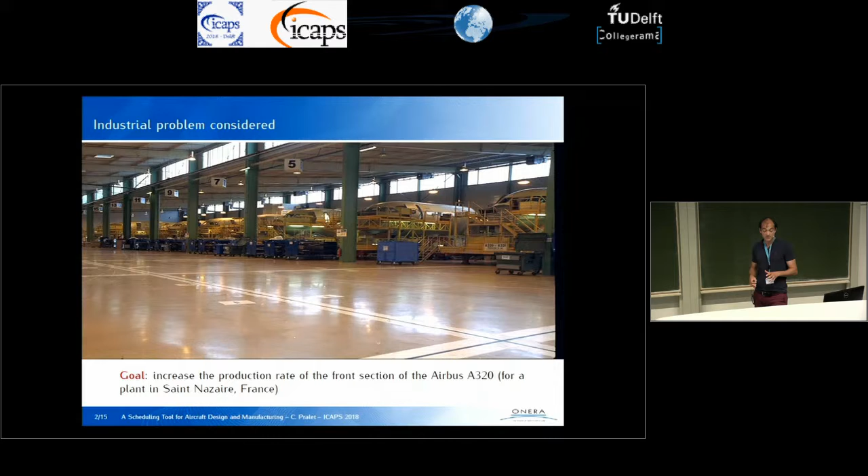In this work, we are interested in increasing the production rate of aircraft, more precisely the A320 aircraft. One of the parts of this aircraft is built in a city called Saint-Nazaire in France, and you can see here the assembly line, which produces a bit more than 50 aircraft per month, and each aircraft costs approximately $100 million. So it's very interesting for Airbus to increase the production rate.

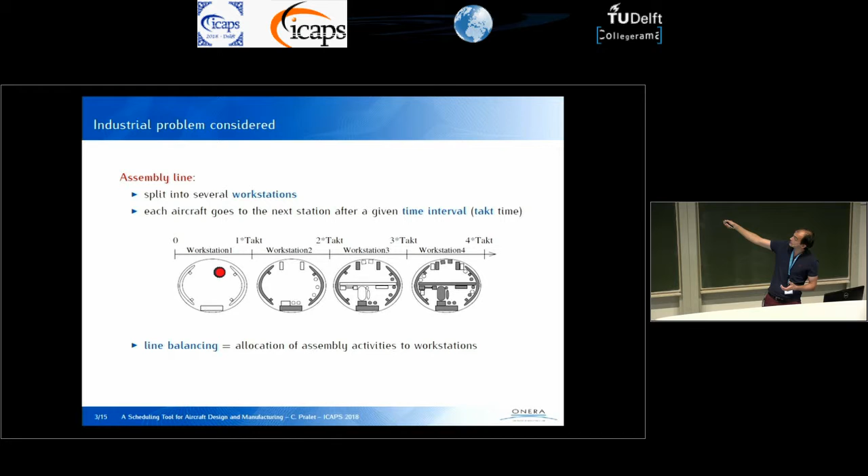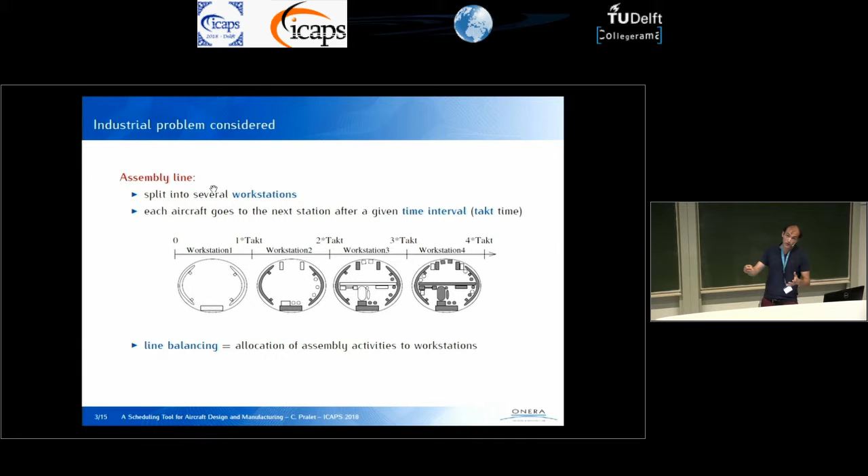In this assembly line, we have a set of workstations, and the principle is that each aircraft goes from one workstation to the next one, and at each step, additional parts are integrated in the aircraft. Here you have a representation of the section of the aircraft, which is almost empty at the beginning, and at the end of the assembly line, it is full of a lot of parts. And at the manufacturing level, the manufacturing teams build what is called the line balancing, which allocates all assembly activities to the workstations. Now, how do we increase the rate?

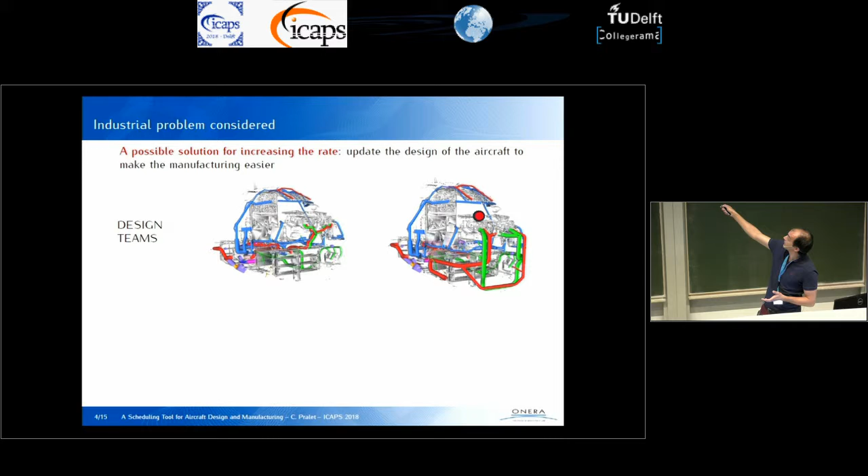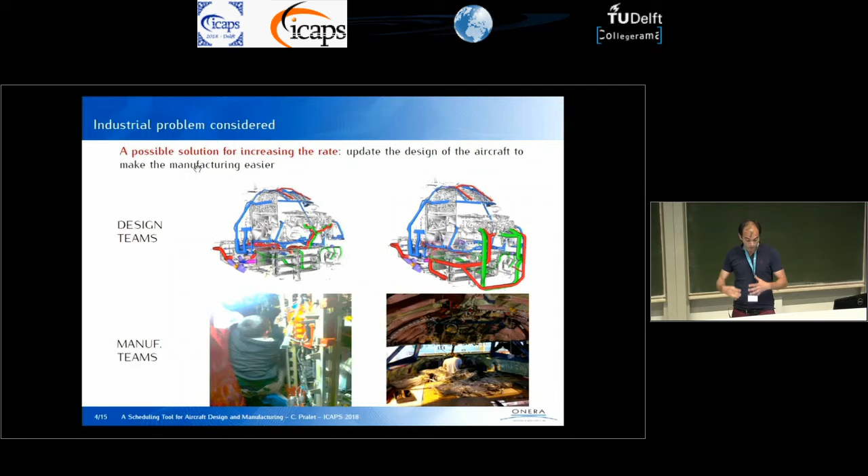A possible solution is to update the design of the aircraft in order to make the manufacturing easier, because at the level of the design teams, there might be several design choices at a given time. Here you can see two design choices where the pipes in red, green or blue go in different directions. Depending on the design that you choose, the manufacturing process can be more or less complex for the manufacturing teams. Here you have an example of a worker working in a very tiny zone. It's not very practical for ergonomic conditions, whereas in the example on the right, the worker works in the cockpit, so he has more space. It's easier.

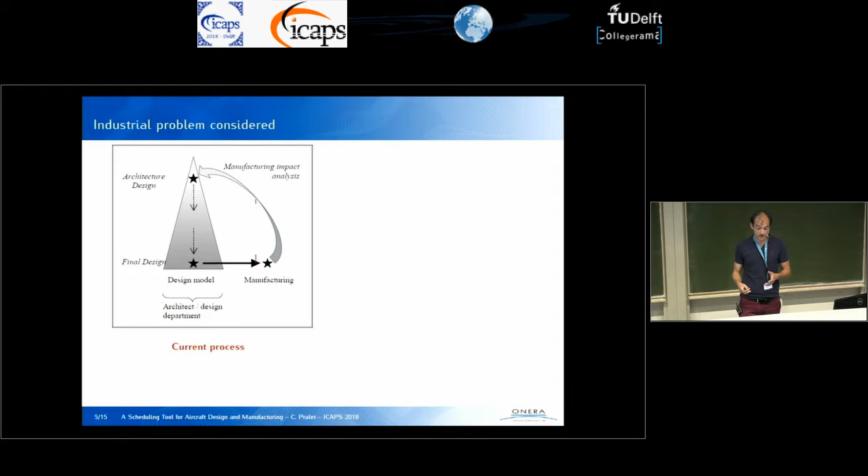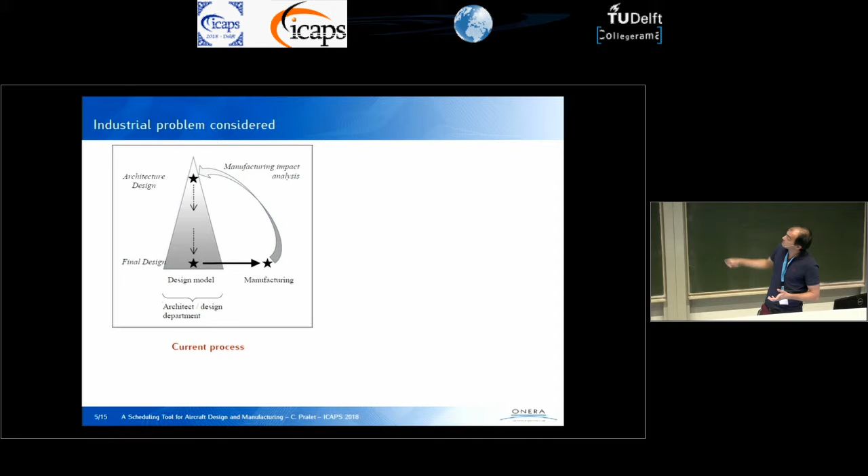If we look at the current process at the interface between the design teams and the manufacturing teams, the design teams start with a global design of the aircraft. This design is refined step by step, and at the end, when they have a final design, they send it to the manufacturing teams, which then build a schedule of all tasks to be performed on the assembly line. The manufacturing teams can also give some feedback to the system designer. But the drawback is that this loop takes several weeks or even several months in some cases. Our goal in this study is to make this redesign loop much shorter.

The way we do this is that, at the level of the design teams, we integrate a high-level model of what will happen on the manufacturing side for a given design. We want to provide the system designers with tools that help them assess what will be the manufacturing bottlenecks given a design, and more generally, what will be all impacts of the design decisions. And we want to give this feedback instantaneously to the design teams.

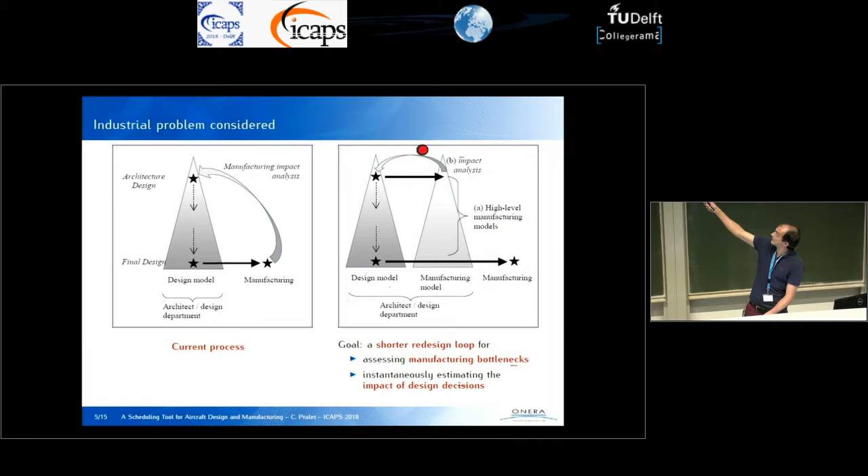Now I'm going to present the high-level model that we build at the design level. It's a simplified model of the assembly line because the design teams don't know all the constraints of the manufacturing teams. In this simplified model, we consider that the aircraft is made of a set of zones: the cabin, the cockpit, several cargo compartments. Each aircraft zone has some capacity. In some zones, you can put only one worker at a time. In other zones, you can put 5 or 6 workers simultaneously.

We have a set of assembly tasks to be performed, almost 1,000, and these tasks cannot be interrupted, so you cannot stop a worker in the middle of his work. For each task, we know beforehand the associated aircraft zone and the number of operators required by the task. In addition, we have a set of precedence constraints between the assembly tasks. So far, we are in standard scheduling: we have an RCPSP because we have resources, tasks, precedence constraints. But as usual in applications, we have side constraints, which make things a bit more complicated.

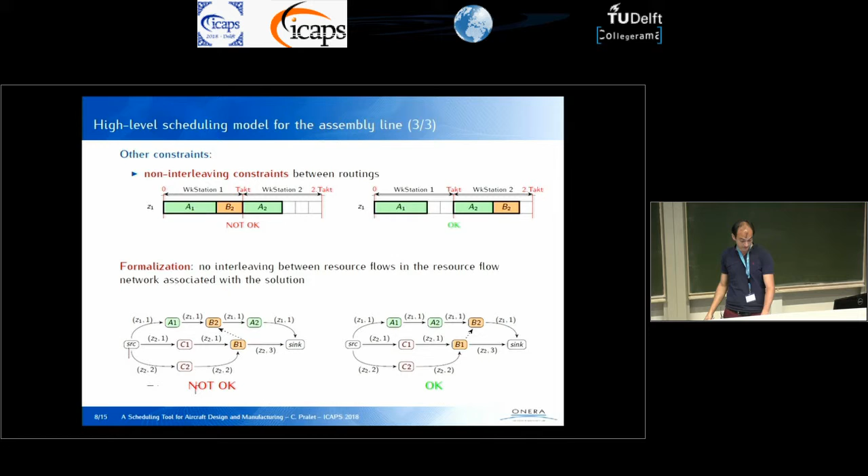Whereas in the second case, here, we can see that we perform A1, A2, and then the unit of resource flow associated with this zone is delivered to B2. So we accept only this resource flow network here. So this was the modeling of the problem and the different constraints considered, where the non-interleaving constraint is the harder to formalize.

And now we come to the scheduling algorithm that is used to quickly build a schedule that will be used by the system designers to evaluate the impact of their decisions. But before looking at this, the first step in our study was to take the existing line balancing and to try to simulate again this line balancing using our model. And to do this, we have some data which describes the existing line balancing, and from this data, we are able to extract an ordering of tasks, and more precisely, an ordering of the routings to be realized.